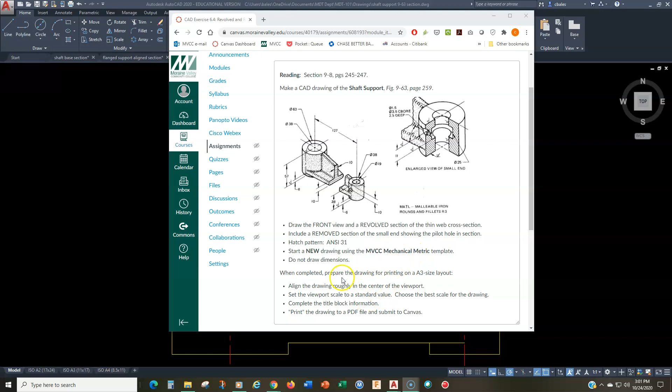All right, so this is what I've done so far. We have the top view. Mind you that the spacing is maybe a little bit too close. Like I said before in the other videos, I like to keep it close so that my drawing can be enlarged in AutoCAD, and I'll just space it out later when I get to arranging it in the layout. So anyway, here's my top view, and here's my front view. This should be pretty straightforward. I don't think you should have a problem with these 2 views up to this point.

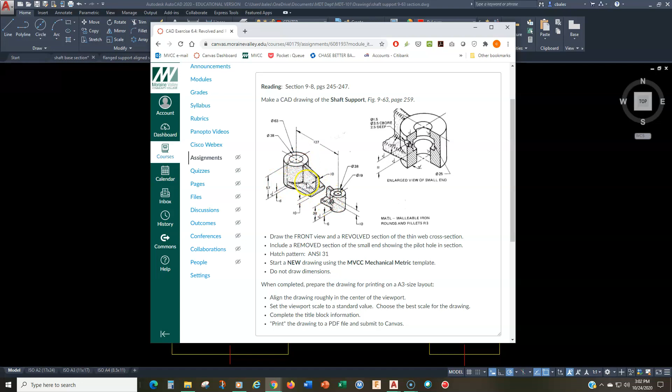But I do want to draw your attention to a couple of features here that are kind of outside of the section view part. And that is, this object has fillets and rounds in it. And you can see it here clearly in the figure that there's fillets and rounds on all the surfaces here. And then it says right here, the rounds and fillets are R3. All right, so we need to add that in here, and that can be a little bit tricky. So let me show you how we're going to do that.

So let's zoom in on the top view here. We'll do that first because that's the easiest part. We'll go to fillet. And remember that for fillet, you got to put the radius in there first. So I'm going to type in R and hit enter, and then the radius 3, and it's already in there. And then we're going to click this line and this circle. What AutoCAD does nicely here is it doesn't trim this part out, so that would be annoying if it did that.

We can go back to the fillet command, and because we've already put the radius in there, we don't have to do it again. And then we do it again, and then I hit the space bar and we do it again. All right, so far so good. So there's the top view with the fillets in there.

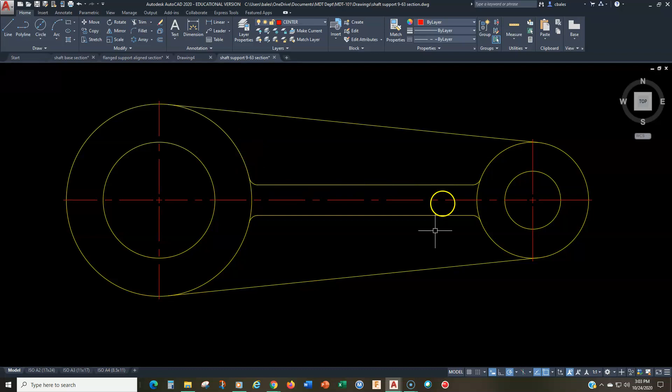Now, how does this play out in the front view? Okay, well, we need a fillet right there. So let me go ahead and put that in there. Fillet, and I'll put that right there. Okay, and we need also one on the bottom surface right there. And you know, we need one over here too. And that's going to be where we run into some problems.

So out here and out here, we have some issues with the rib. Clearly, you can see the rib, or the horizontal part, whatever you want to call it, the web, continues along the cylinder, and it runs in tangential to this surface. All right. It does the same on the back.

It runs in tangential, so it spreads out. So out here, this is not correct, right? This surface continues out like this. Where does it continue out? Well, it continues out to the line of tangency. So I'm going to draw a line from the point of tangency right here. And you can see I can grab that with Object Snap Endpoint.

Whoops, I don't want to do that in my center line. I want to put that in a visible line. So let's go back to the line command and let's grab this endpoint right here and let's just project it down, okay? So I'll zoom in here. This line continues out to there. So we can extend here and here, all right?

But what happens at the end? Well, notice that we have a fillet out here. That means that there's a curve going all the way around this until the curve just vanishes, right? So how do we handle the curve out here? It is not a full quarter circle fillet. What it should be is half of a fillet. So let me show you a trick for doing that.

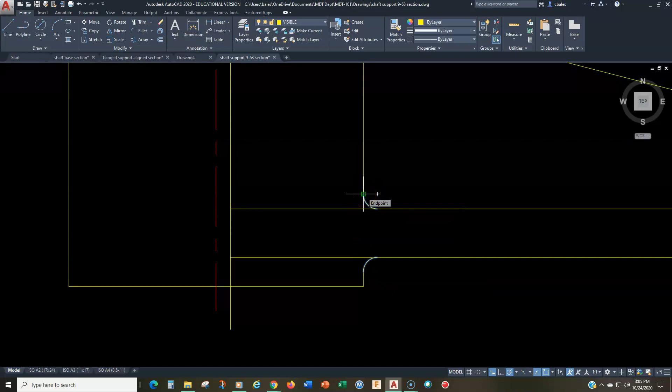We already have one here. So what I'm going to do is I'm just going to copy this because this is the basic geometry that we need. And I might as well copy this one while I'm here too. So I'm going to select the fillets and copy it. And now I'm going to grab the end here and copy it to the perpendicular intersection right there. Okay, so far so good.

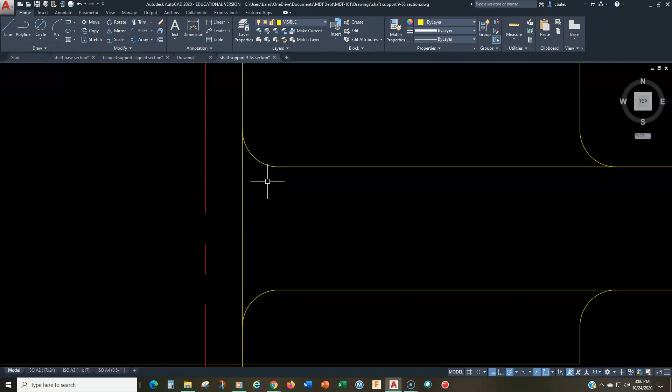Now, we're almost there. I can trim this away. I'm going to leave this here just as a line of reference so you can see what I'm doing. But now we need to cut this in half. So here's how we cut it in half. We draw a line from the center of the fillet at an angle of 45 degrees. Now I'm going to draw it past again just so you can see. And we hit escape. And now we trim off the top part.

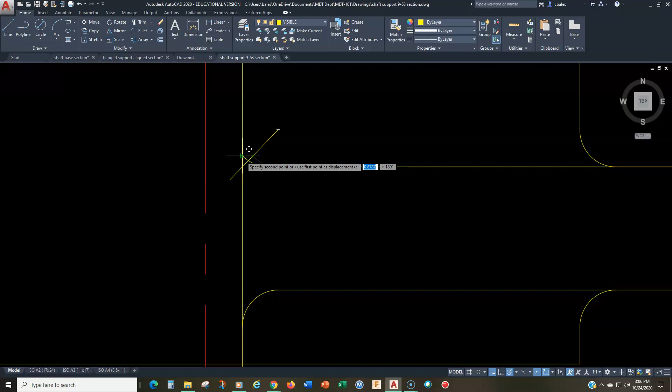And we're not done now. We have to now move this a little bit further over here. So we can go to the move command and we can grab the end here and then we need to extend that like that. So did you get that?

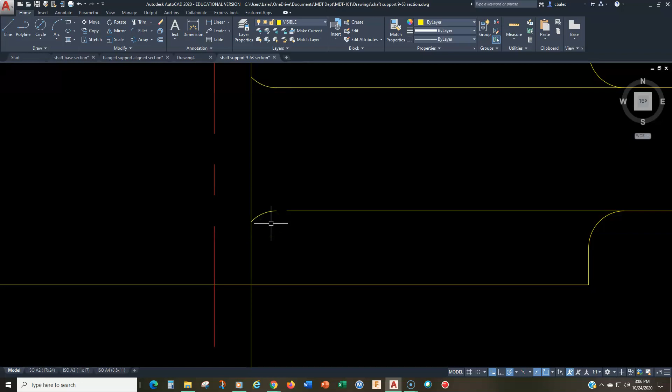All right, let's do the same thing over here. We're going to draw a line from the center at 45 degrees. I'm going to trim this part away. I'll erase this, and I'm going to move this from here to here, and then we can extend right there. And that is what we call a run out. So I can erase that.

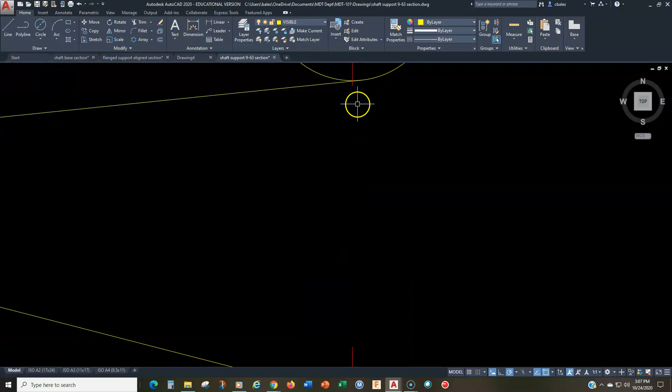Now, I need to do the same thing over here, and I want to warn you, I left this here to show you clearly that the lines do not end at the center line here. If we look, the point of tangency is actually back here. So if I draw a line from the point of tangency down, you can clearly see what's going on.

Now, I could go ahead and do the same construction that I did on the left side over on this side, but I'm going to encourage you to be a lazy drafter. I know that sounds weird, but lazy but correct is called efficient. So I've already done the construction I need over here, so I'm just going to use the mirror command, grab these two things, and mirror it.

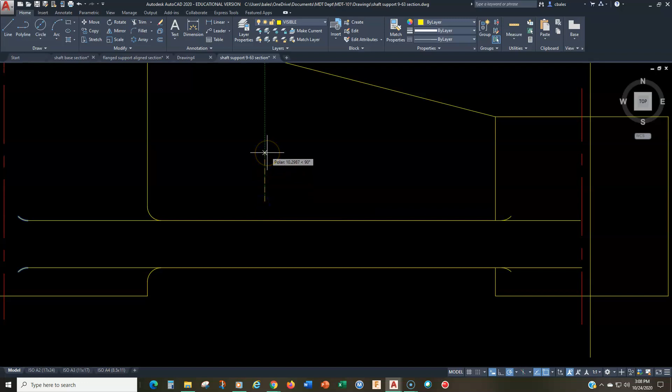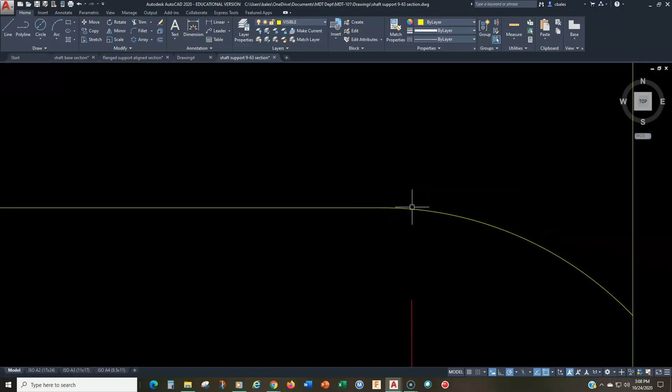Now, I don't have an exact mirror line, but don't worry about that. Just pick a mirror line right about there and get it over there, and then you can move them. So I'm going to pick those two, and move it from here to here. And you can see I got a little bit of that left over, which we don't want. That one looks good. That was from when I previously had it in there.

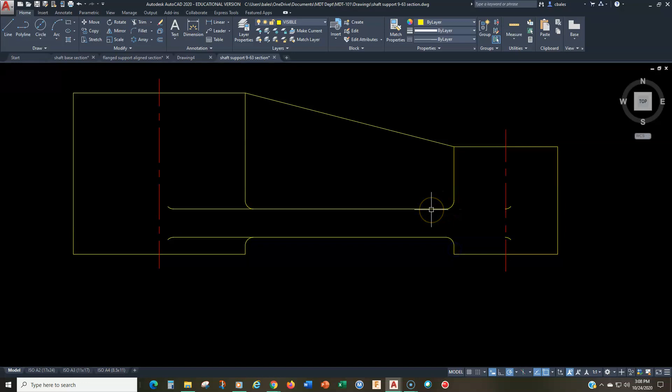And there we go. Can't forget this, and this, and this, and this. And what did I tell you? It took that away. No problem. I'll just extend that through there and through there and make sure I got it all good. Zoom in there. That looks good. Zoom in there. That looks good. So there is your front view and top view completed.

Of course, without the revolve section and some of the other features in here. Okay, so...

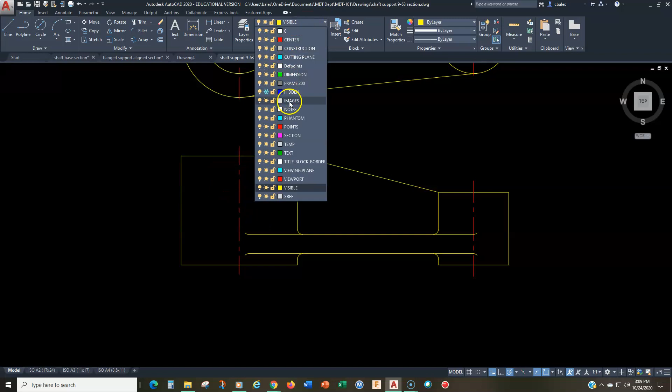So let's go ahead and finish with the hidden lines on this. Oops, I guess I have that turned off. There we go. Let's make this the correct layer. As you can tell, I've done this before, so I'm just reusing a previous drawing and adding to it. And I want to get rid of this because that's not going to be helpful to us.

All right, so there's my hidden lines here. Almost all the hidden lines, right? Of course, we're missing some hidden lines here for the pilot hole, but we're going to leave that out right now. And we have some missing hidden lines here for the pilot hole there.

All right, so let's do the revolve section first. Okay, now it says in the instructions to choose, for the revolve section, an area roughly near the middle, right? We don't have to get really detailed and accurate with that because it really isn't going to matter.

So I'm going to draw, this is going to be a reference line. I'm just going to draw a reference line right about there. That looks good. If we wanted to get it right in the middle, we could do a middle object snap and just bring this down like that. And again, that's a reference line, so I'll shoot that up there. It's just a reference line, and that's where we're going to base our revolve section.

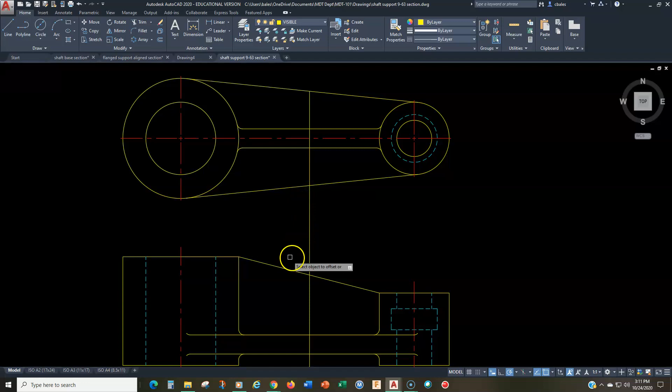And now I want to take it and apply it here and here. Now you can see if I pause, that dimension, that distance, is actually 24.7271, and there's probably another twelve decimal places in that too. So this way I can do it as accurately as AutoCAD will allow me to do it.

Okay, so that's going to give us the left and right extents of our rib section, our revolve section. So we can actually trim this off right there and right there. I think as I draw this, you'll see more and more of what I'm going to be doing.

The rib on the top part here has a width of 10. So I'm going to offset 5 to the left and to the right. And again, I'm going to trim it so that we can see what's going on here.

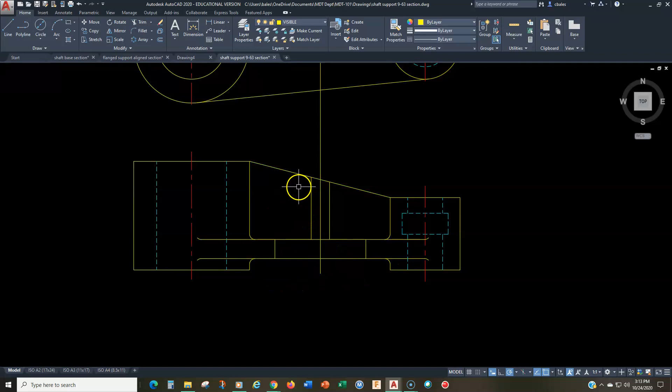Okay, so far so good. Now, I think I can get rid of this line, or actually, you know, I'm not going to get rid of that because I'll change that into a center line. I think that would be more helpful. It will need to be a center line eventually, so I might as well change it now.

All right, so now here's where it gets a little bit nuanced and you have to pay attention, okay? So first of all, the rib right here, there's not a line going through the rib, or the section, so I need to pull that out.

Secondly, these are going to be filleted, so I can put a fillet in there with a radius of 3 again, and we can do the same thing there. This is going to be a radius of 3, as is this, and here, but you know what?

I don't want to have to trim and then extend all of these, so let me show you a trick with the fillet command. We go to the fillet command, and the radius is already set at 3.

I'm going to use the down arrow and say no trim. Normally you don't want it like this, but in this case I think it's better to put it in there. It doesn't 100% fix it because now I have to trim this little section right here, and you will too if you do it this way.

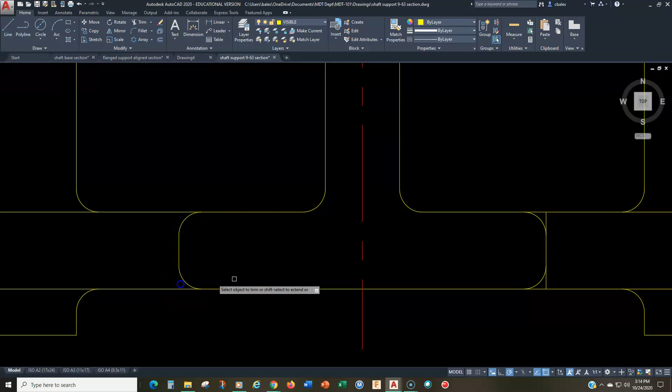But it might be a smidge faster. Now you can see what we've done here. We've basically taken this upside down T section right here, taken it out, rotated it, and put it right back down in place.

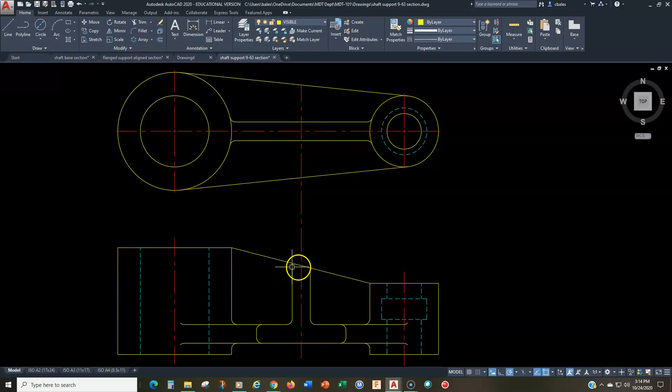Now the last little bit here, which is definitely where people drop the ball, is the top. The top is flat - well, not in my drawing right there. So what I have to do is draw a line from the intersection of the center out here, like so, and extend that there.

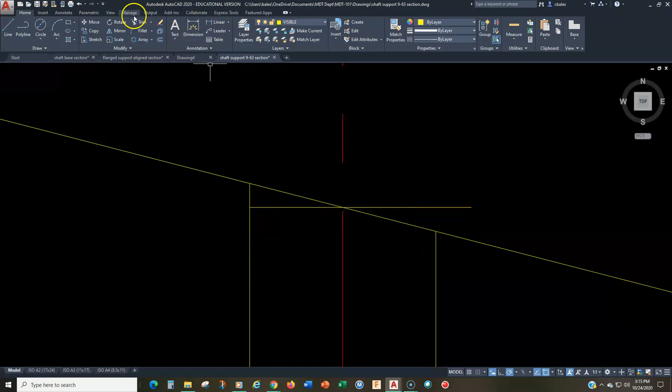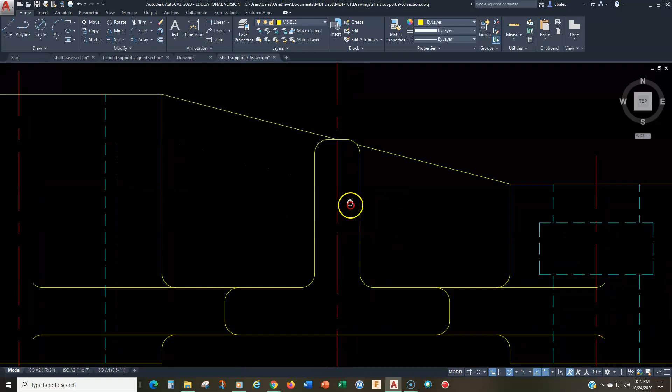Well, not quite. We'll go to fillet. Now I do want to trim here, so I'm going to hit the down arrow and go back to trim, because I do want to trim this right there, and right there. And of course we want to get rid of that little portion behind there.

And there's our revolve section. So you see that's the T section, the upside down T, that is the cross section of this web rib kind of thing in the shaft support.

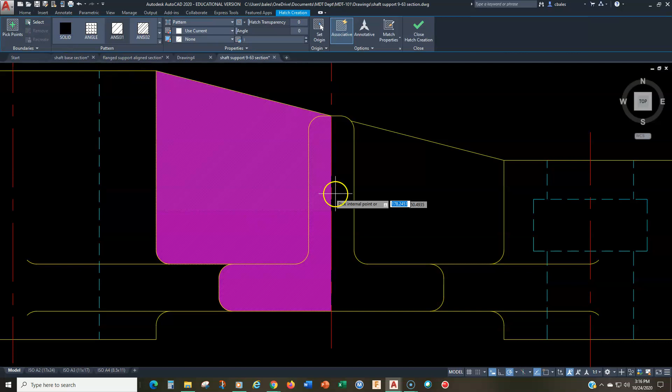Now we need to section it. Let's apply a section line. There we go - yikes, that scale is not going to be very good. So let us change the scale - I don't know why it's so bad here - to 25.

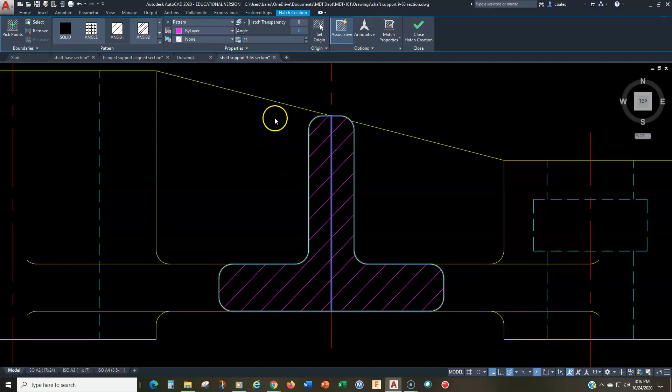This might not be the case for your drawing. You're going to have to adjust the scale according to your drawing. The drawing I'm using here is actually an older drawing I completed a few years ago, so the template might not have the same settings. It's no big deal - you just get to do that yourself, and then everything else is good. The angle is good, and we close that.

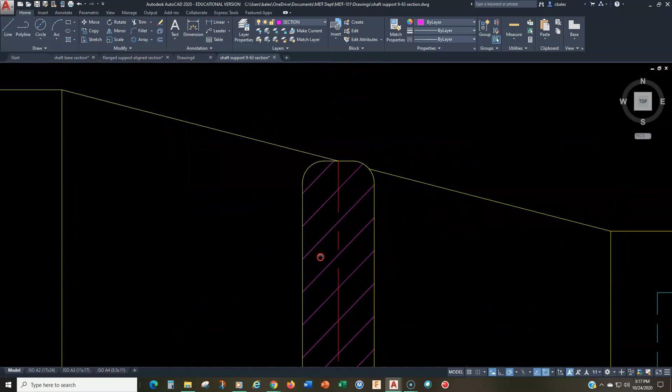So there's our revolve section. Now I'm going to trim this out here and erase this, so I'll get the center mark correct. Trim that back, and I'm going to use this - this should extend 6 millimeters past the edge here, and same thing down here, 6 millimeters, and there we go. All right, so far so good.

All right, so now let's do this one here. This is definitely the tricky part - I think it's tricky to just understand what you're drawing, to understand the view you're creating. Sorry, I'm drinking coffee while I'm doing this, so if you hear me slurping, that's what that is. I apologize ahead of time.

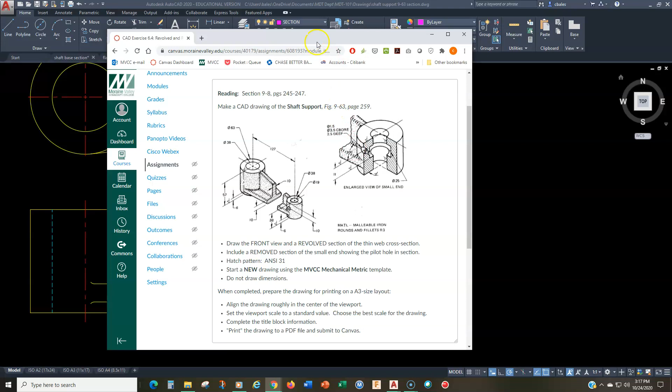All right, so the pilot hole is on this front side of this. If we look right here, we can see there's the pilot hole. So we're not even going to be able to draw the pilot hole in this view or this view, not yet certainly. And so we really need to understand what we're drawing over here.

We're going to be drawing a side view of a cylinder - in fact, the side view of this cylinder. Cylinders are easy to draw, right? In their rectangular view, their side view, like I have here, they're symmetrical.

So look, I can go ahead and copy the window right there, and copy all of that stuff right over there. So there is where my full section is, my remove section is going to be. So in essence, what I'm doing - let me clean this up a little bit.

I'll get rid of these runouts. We don't need the runouts. Okay, so look how easy that is.

That's what we're going to be drawing, except we're going to be looking at it from a different angle—90 degrees to where it is now. Maybe it would be more helpful to imagine it from this perspective. Let me just show you how we would do that. I'll put that up there. Just bear with me, this is just for visualization purposes. This isn't going to be how you're going to draw it.

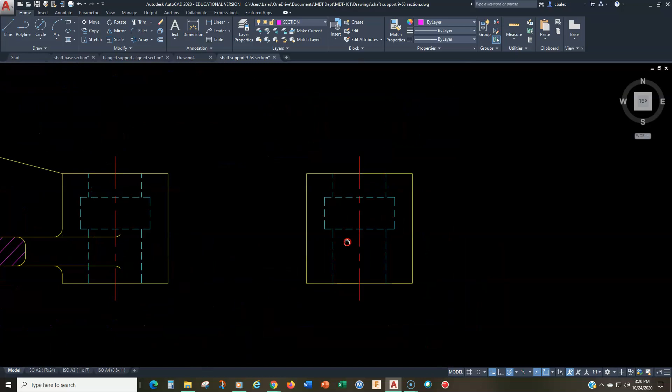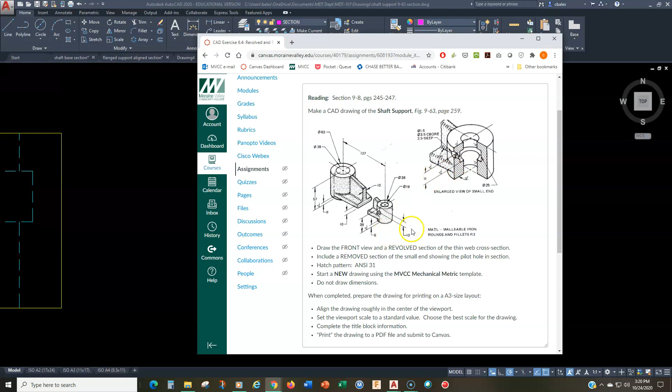Let me just zoom in here, and I'll pull this across so you can see the dimensions right there. It's a diameter 1.5 with a diameter 3.5 counterbore that's 2.5 millimeters deep. From the opening to the bottom is 11 millimeters, and it's 10 millimeters from the top, and it's at an angle of 30 degrees.

Wow, that's a lot of stuff. Okay, so how are we going to do this? All right, let's offset first 10 millimeters. That's where it starts. There we go, 10 millimeters.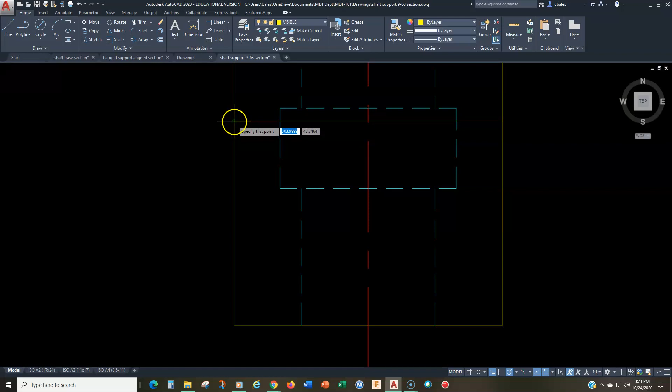Okay, and then it goes at 30 degrees. So I'm going to draw a line from here at an angle of 30 degrees. I don't want section, I want visible. Let me change this to 30, 60, 90. And then we'll draw a line here, and we'll make sure we get it 30 degrees from horizontal. That's the dimension that we got.

And I'll just go this distance. I know this is longer than I need, so that's sufficient, okay? Now, I like to erase lines as I think they're going to become confusing to me, so I'm definitely going to get rid of that line. I don't need that line.

Let's see. Now I just want to draw the hole, right? So the hole is going to be at an angle, and it is a diameter of 1.5 through the thing. So what's half of 1.5? 0.75. So we're going to offset 0.75 this line, that's the small portion of the hole.

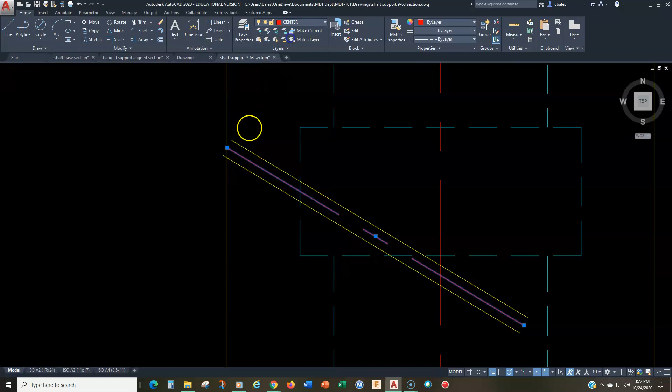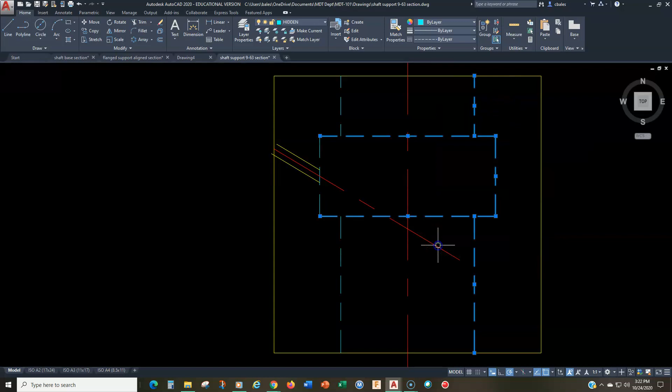Then, maybe it would be helpful if I change this to a center line just to help you visualize things. Okay, let's see now this, and I can go ahead. I'm trying to figure out what I can clean up to help you understand what you're looking at. There we go. Okay, and in fact, all of these lines should be visible. I'll go ahead and change these to visible so that we can see that clearly. There we go. All right, so now it's looking a little bit better.

Now we have a diameter 3.5 counterbore. So what's half of 3.5? Well, I don't know what half of 3.5 is. Maybe I'm having a bad day with math, right?

So let me show you a little bit of a trick. We go to offset, and then it says, specify an offset distance, and it's half of 3.5, which is what I want. But I'm having a little off day, I don't know what half of 3.5 is. So I can do this: watch, apostrophe CAL, hit enter. And then it goes into a transparent command. That's AutoCAD's terminology for a command within a command.

Now, let's extend that there. Now, the depth of the counterbore is 2.5, okay, it's 2.5, and it's going to be measured from the center right here. So let me show you a little bit of a trick to do that.

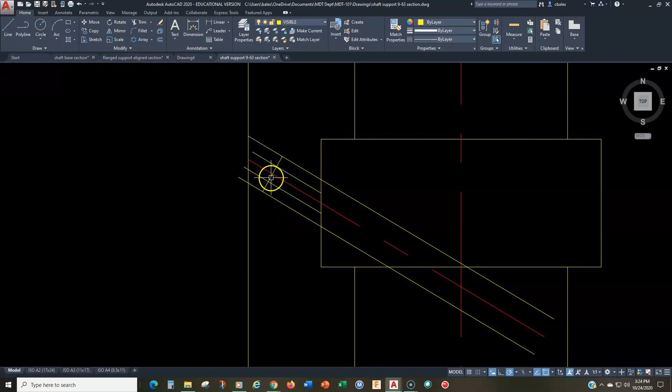All right, so now let's clean this up, and I think you'll be able to see what we did. So let's first get that line and those lines trimmed. We'll get that line. I'm kind of doing this very slowly, probably too slowly. There's our pilot hole right there. Okay. In its profile view, we have the counter bore, and then we have the through hole going through there.

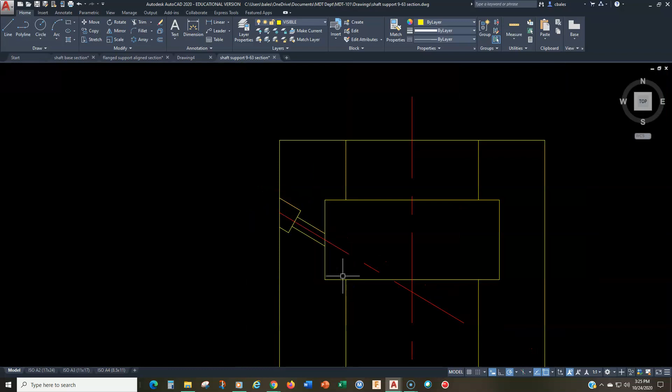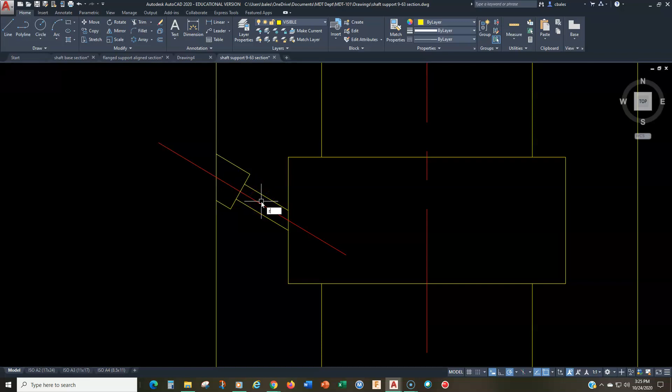Okay, so let's clean up while we're here. We might as well. Whoops! I don't want to do that. Sorry. While we're here, we might as well get rid of that, trim that back, and then we can extend that, and that's going to be 6 millimeters here. So we'll go 6, and then we go 6 millimeters. And don't worry about it not breaking or showing the dash. That's an AutoCAD thing. All right, so there we go. So there's our removed section.

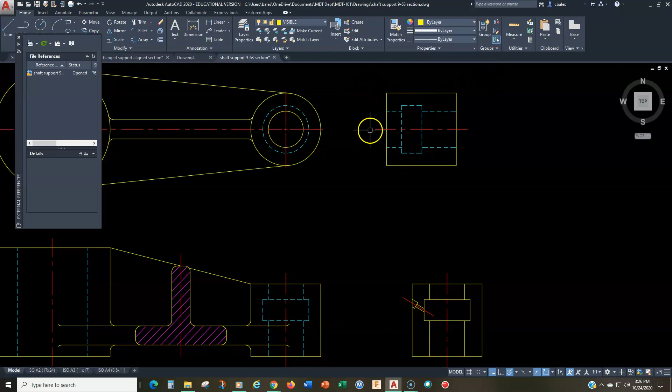Okay, now in this case, we do need to put a cutting plane line because it's not going to be obvious where that cut is being made. By the way, we could just as easily put this up here. So let me just show you what that would look like, because it is also correct. So I'll move this up here. And you would do exactly the same thing as I did, except it would be rotated.

So I want you to understand the way the views line up. Obviously you wouldn't move this, you would draw it in this position. But there you go. Okay, so there's the removed section projected from the front view over here. Here's the same removed section projected from the top view. So either way, you only need to show one, but these are equally valid.

So now to add a cutting plane line, basically the easiest thing to do is just replace this, put it on the cutting plane layer, right? And then we need to extend this a little bit. So the offset is 12 millimeters, 1/2 inch for that. So we need to extend that out there, right? And then we can get rid of this and get rid of this.

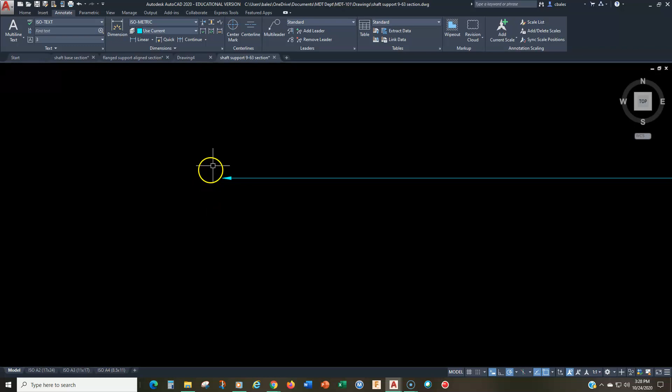Which way is the arrow going to point? Here's the section view, so the arrows are going to point to the left. So I can go to cutting plane and annotate and multi-leader and put it out there, just like that. Oh, you know what? I don't think I have the right arrow size in this drawing. Yeah, so here. This is not going to happen to you, so don't worry about it. This is just part of the issue that I'm having.

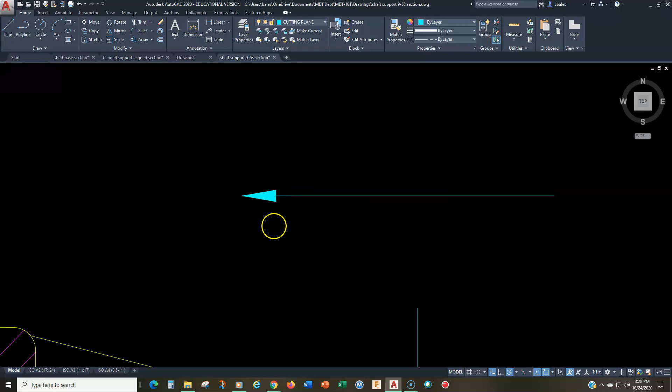So I'm going to scale this first. Whoops, I need to explode it first. So this little bit is extra. This is just me trying to fix my own template. So I'm going to scale this first by 25.4 because I think it's in inches. And then I'm going to scale it again by 2 because we need it to be scaled by 2. And then I'm going to offset 12, and we'll put it right there.

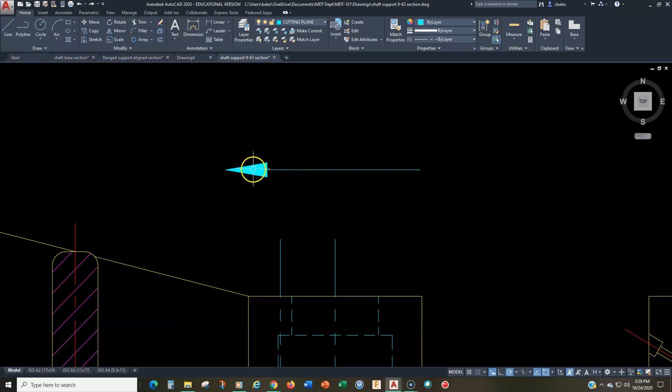And we'll move this from here down to here. Whoops. Let's undo that again. Let's move this from there down to there. We can trim that, erase that, and then we can just copy this from here to here.

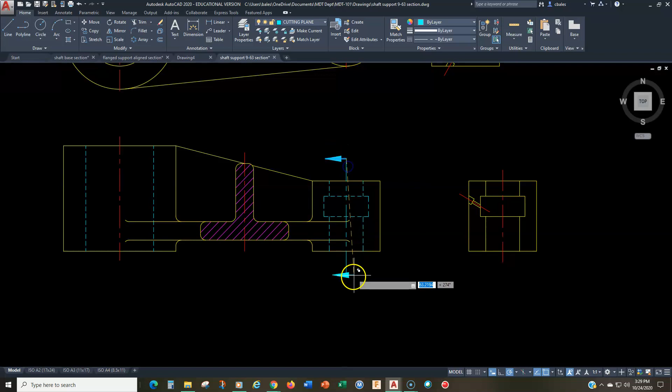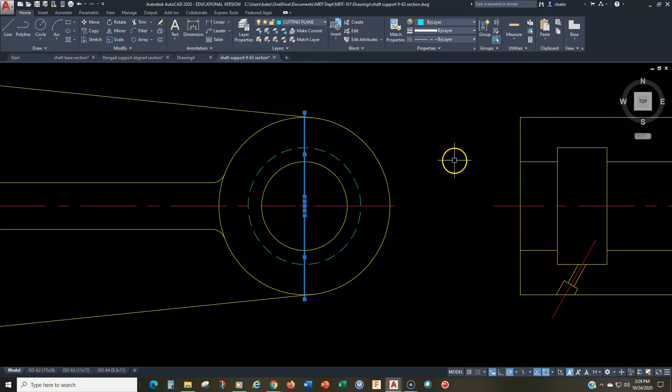Okay. For those of you that want to be adventurous and put it up here, that's no big deal. We just need to get rid of this line, right? And in fact, I'll show you what we can do. We can also just take this and this and this and put it on the cutting plane layer. There we go. And then this is really going to be the same. So watch what I can do here. I can offset 12, offset that out.

We can extend this like so. Okay. Get rid of that construction circle. And then we can copy this from here to here. All right, so there we go. So there are two solutions for the removed section here. Whether you want to develop it from the top view or project it from the front view, it's up to you. All right, let's just finish this up.

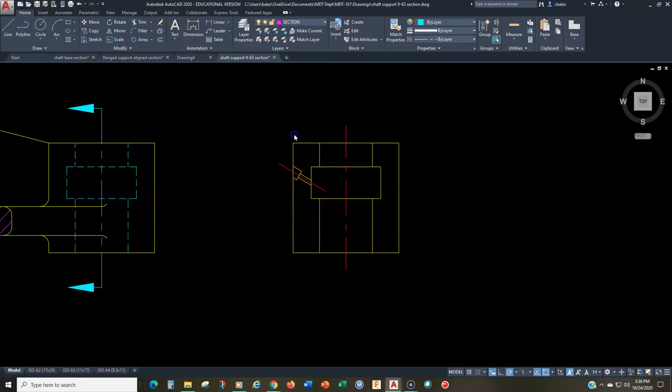We need to go to our section layer and put our hatching in there, like so. And then we'll do that again, and we'll do it up here, depending on which way you want to go. And let's just balance this out a little bit. We'll move it out here like that. Okay. So there we go. Zoom extents.

Now, one last thing about this. We're showing hidden lines in here. We got the hidden lines for the back hole. We got the hidden lines for the stepped hole in here. We got the hidden line for that opening, that larger diameter right there. What about the hidden lines for the pilot hole? Now, this is where technically, we should put the hidden lines in here.

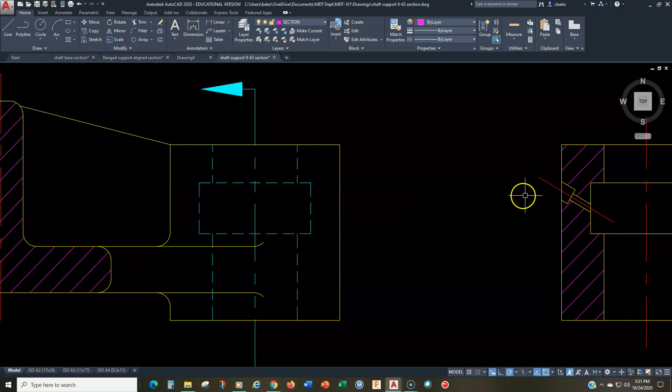There's a couple of different options for doing this. The hidden lines would be shown in the top view here, but they're going to be kind of messy, because it's going to be elliptical. Now the hidden lines here, we also have visible lines, and we can't really omit visible lines. So let me show you what I'm talking about here. So let's go to the visible layer.

So on this surface right here in the front view, we're going to see the opening for the pilot hole. So I'm going to draw a line from here to find out where that opening is going to be. And it's going to be right there. And I'm also going to project the top of the hole and the bottom of the hole right there. Okay.

Now, this is kind of like what we did in auxiliary views. This dimension is stretched. The dimension to the left and to the right for the hole is not. Forget about the fact that it's around a cylinder. That makes it really, really super complicated. But we don't have to draw that. That's not the conventional practice, as I'm showing you right here.

So this is a diameter 3.5. And again, I don't know what half of 3.5 is, so I'm going to go to offset and do apostrophe cal, 3.5 divided by 2. And then we'll take this line out here and this line out there. Now if you're wondering what I'm doing, let me make these visible lines so you can see. I've just framed in where the ellipse is going to go.

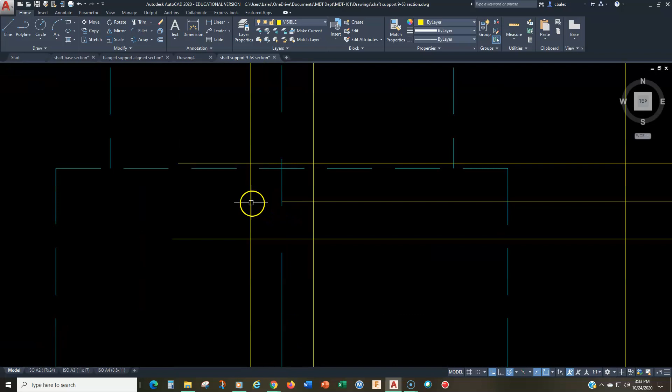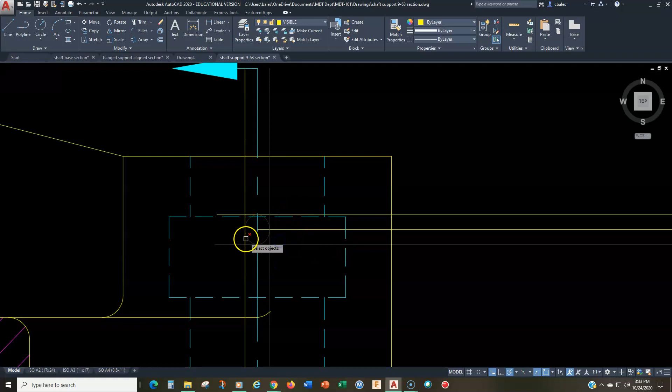The center of the ellipse is right there. The left and right extents of the ellipse are there, and the top and bottom extents are right there. So now I can draw the ellipse, and I can use either axis end or center. It really doesn't matter. I'll use the center. I choose the center, I go this direction, and then I go right there. So there's the ellipse. Now I can erase these construction lines because we don't need them anymore. And I'll leave the center in there, though that's not really helpful either. And so there you go.

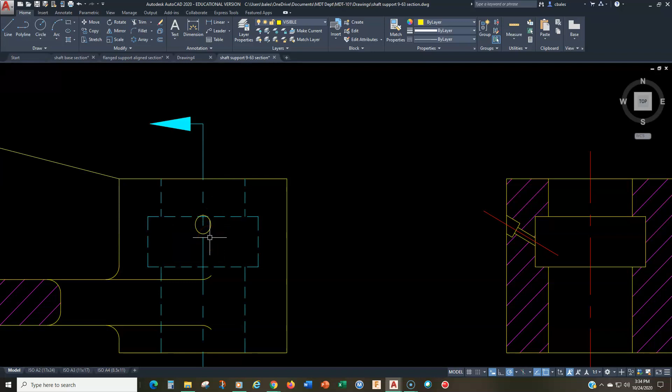Now, you can also see the back edge of that. So like I said before, I feel like I'm giving away a lot of stuff here. So I better see this in the drawings, because if I don't, that means you're not paying attention to my videos. And I'm trying to show you how to do this properly.

The back part of this hole is the same diameter. It's just shifted down. So look, I'm going to project this across. And again, this is just like we did in auxiliary views. I'm going to copy this from the top here to right there. And then I can trim this away, like so. There we go. Now are we done yet?

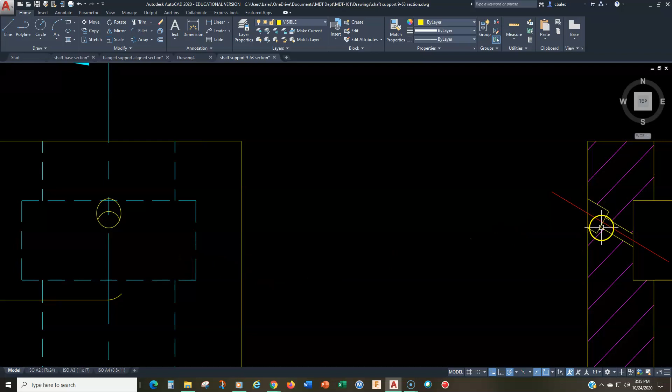No, we actually got another little hole, and you might be able to see that one right there. It's going to be tough, but we're going to project across here.

You know, if you're doing this at work, your boss is going to be so impressed with your accuracy and precision. It's going to be amazing.

Yeah, we are going to see that. All right, and I want to project the center also.

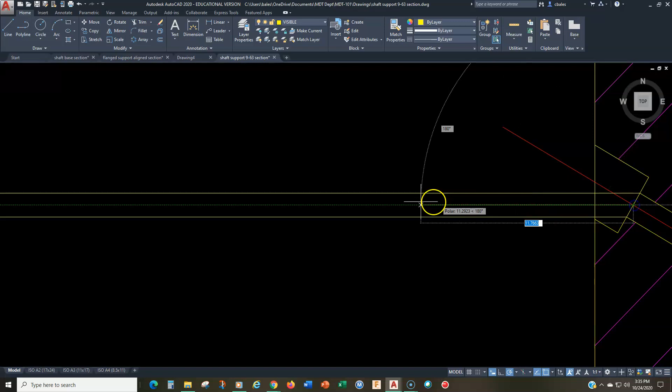All right, and then I need to offset this line, the center, half of the diameter. The diameter is 1.5, I know that, so that's 0.75. So I'm going to offset 0.75. I'm going to offset this to the left, and I'll offset this to the right.

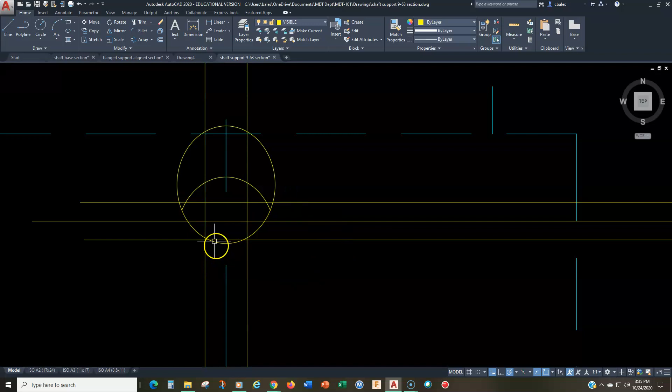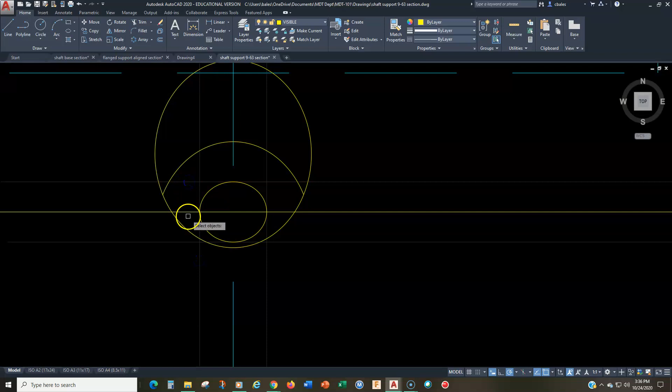Now, see how you've got the break in the cutting plane line that kind of lines up here? Sometimes AutoCAD isn't able to find the intersection there, so I'm going to go ahead and change these to visible so that we can see that, just in case. And there we go. So we go back to the ellipse, and actually we can use the axis end here. So we'll choose one axis end here, the other axis end right there, and we stretch it up right there. All right. There we go. Okay. So there's the pilot hole.

Now here's where it gets a little bit judgy. Let's zoom out like this. And you know, we haven't yet talked about that because that's going to be a different view. All right, so here's what we have here. We have a top view that has a hidden circle right there representing the stepped diameter in this hole, which we're showing in the removed section right there. Okay. Here we have a front view where we have a hidden hole, which we're showing right here.

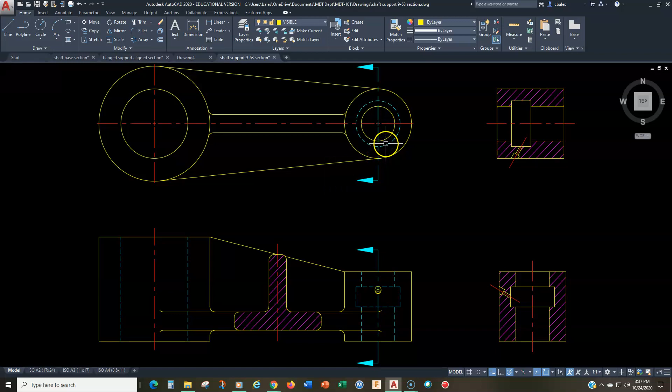And the stepped hole, which we're showing as hidden lines here and over here. Now here's the issue that I have. Remember that there's a rule that we can omit hidden lines, but we're not allowed to randomly omit hidden lines that we don't feel are convenient in a view. So we can omit hidden lines in a view. And if we're going to omit the hidden lines for this pilot hole, which we should, because it's going to be tough to draw that over here, and it's not really going to be very helpful, we need to get rid of that line, that circle, okay?

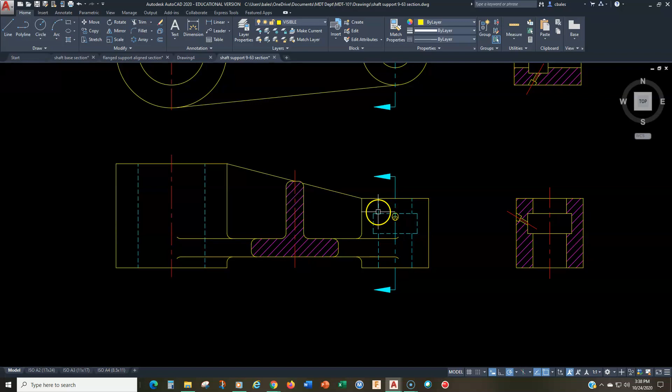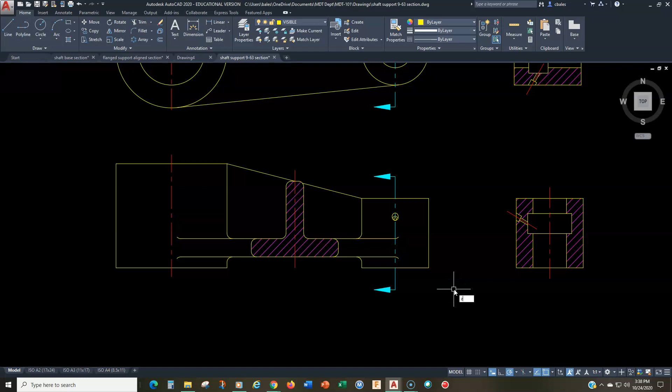Same thing goes down here. We're not going to show the rest of the hidden features for this hole, right? Because there would be a hidden hole right here for where the hole exits, right about there. We're not going to show that there. That's not going to be very helpful. But partial views don't mean that we get to omit visible lines, just hidden lines. So guess what? We've got to get rid of all this stuff here. So all that work we did for that is gone. And if we're going to get rid of the hidden lines here, we've got to get rid of the hidden lines here, right? Otherwise it would be too confusing. And so that is our final drawing, all right?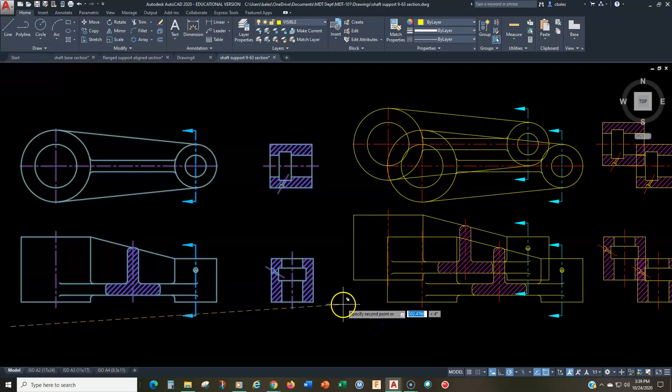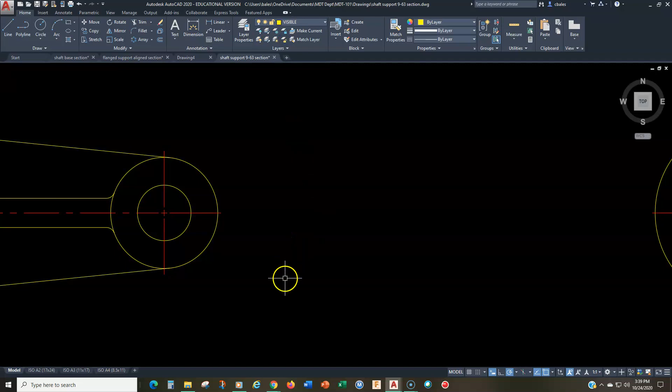Now, bear in mind, let me just say this here. Let me fix this so that I don't have anybody that says, well, you showed both views. No. Let me show you what I'm talking about, okay? So you get to choose which one you want to do. I want to be very clear here because I know some of you are going to say, well, you showed us that we could do everything here. So here's what one is going to be. All right, so this needs to extend out 2 millimeters, and this needs to extend out 2 millimeters, and we need to change that to a center line right there. All right, so there is one solution right there.

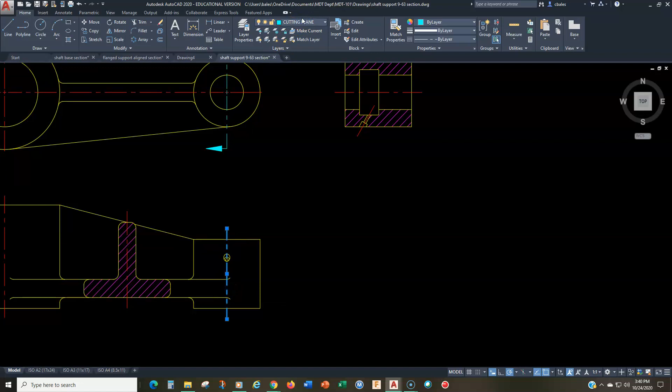The other solution, equally valid, is this solution. All right. Actually, let's offset 6. And then this becomes a center line. There we go, center line there. So this is an equally valid solution, right? The revolved section can be developed or projected from the top view or from the front view. Okay? So there we go. All right, so there's your 2 possible solutions.

I hope that's helpful. I know that's a difficult drawing. But that's why I wanted to do this as a demo. All right. I won't bore you with setting it up in the layout because I think you guys can handle that fine.